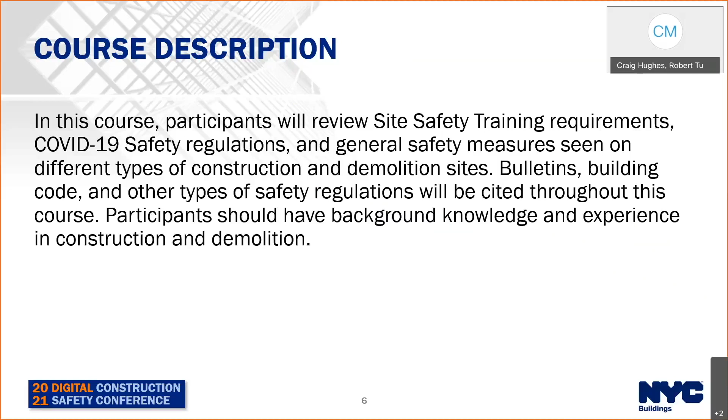We have a lot of information to share with you today. At the end of today's course, participants will review and be able to explain proper COVID-19 safety protocols on construction sites and how they prevent the spread of the virus. We will discuss Local Law 196 and updated site safety requirements to ensure all workers on construction sites are fully and safely trained.

We will review Chapter 33 of the Building Code and other general site safety construction codes, plus demolition and gut rehab safety codes in order to mitigate hazards, to create a safe environment for workers, the public, and properties.

For our agenda, we will be reviewing Local Law 196 and Site Safety Training Requirements, SST, COVID-19 job site requirements, general safety, construction safety including high-rise, which is major buildings 10 plus stories, and low-rise, under 10 stories. Scaffolds, which will include sidewalk sheds, supported and suspended scaffolds. Also included on our agenda is demolition safety, which includes demolition plans, pre-demolition, demolition notification, demolition safety, and demolition sign-off.

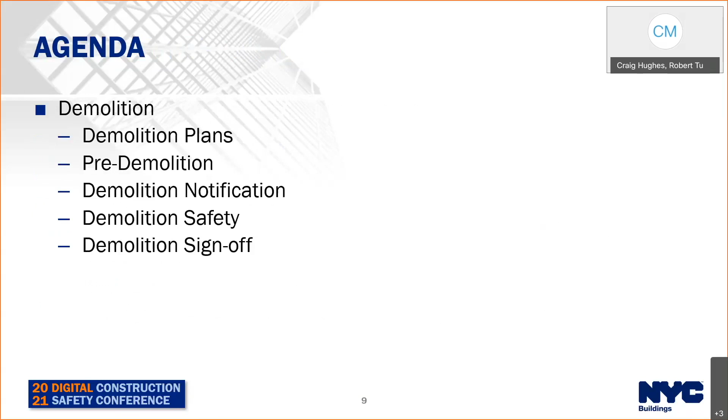We will be going over what is general construction site safety, why it's important, hazard mitigation, and the most common violations.

General site safety refers to safety measures that need to be taken at almost all sites, regardless if they're open, closed, or an interrupted work site. As legislation and current events evolve, so does general site safety. In 2017, Local Law 196 was signed into law, and DOB updated the training requirements for workers on construction sites. In 2020, the pandemic COVID-19 caused worker interactions and safety measures to change.

What is general construction site safety? Here are some examples. Maintaining proper housekeeping, such as removing debris. Keeping and maintaining all required documents on site. Fire safety, such as fire extinguishers, must be kept on site in accordance to FDNY. Training, making sure all construction workers on site have at least 40-hour site safety training.

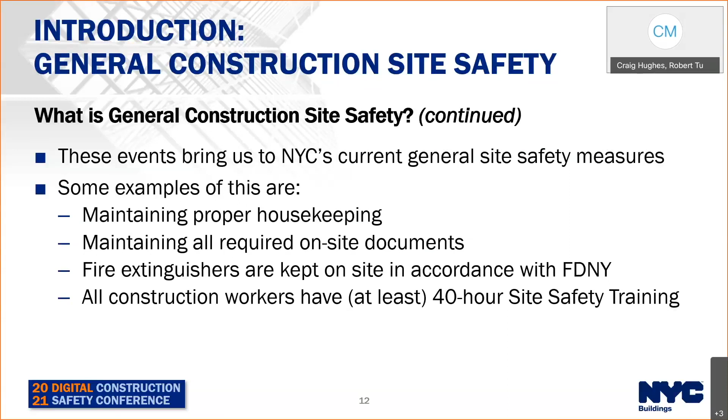Responsibilities for closed and interrupted work sites. A closed site is a site that is inactive for a short period of time, with anticipation of returning in the near future. An interrupted work site is a site that is inactive for a prolonged period of time, with no anticipation nor scheduled date of return. Some of the reasons may be lack of funding, and it will remain closed until they reestablish funding. Interrupted work sites must keep permits up to date, and site safety inspections shall be conducted periodically to ensure the safety of the site has not been compromised.

Hazard mitigation. There are 5 methods of control to mitigate hazards, listed here from most to least effective. Elimination, which is the most effective, to physically remove the hazard. Substitution, replacing something that produces a hazard with something that does not. Engineering controls, isolate people from the hazard, such as barricades and controlled access zones. Administrative controls, institute safe work practices, such as training, written rules, and policies. PPE, provide workers with personal protection equipment.

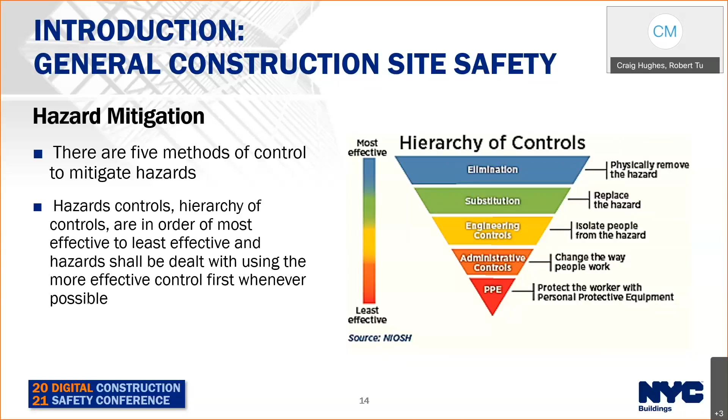Why is it important? In 2020, there were a total of 796 incidents. The top incidents were materials fall and struck by, which is 23%, slips, trips, and falls, which accounted for 36%, and lacerations, which accounted for 24%. Using safety measures and hazard mitigation acts as incident and injury prevention. It saves money, time, and resources in the long run.

The top 10 violations issued for site safety monitoring are as follows. 26% of the violations issued were due to work not conforming to the approved documents. 16% of the violations issued were due to sites failing to maintain or display safety documents as required by Chapter 33. 10% of the violations are due to the construction superintendent's failure to perform duties.

10% of the violations issued were due to job site fence not being maintained as per code. 9% of the violations issued were due to failure to comply with the fire code. 8% of the violations issued were due to failure to protect adjoining or adjacent property. 6% of violations issued were due to failure to maintain scaffolds as per code. 5% of the violations issued were due to failure to obtain required training.

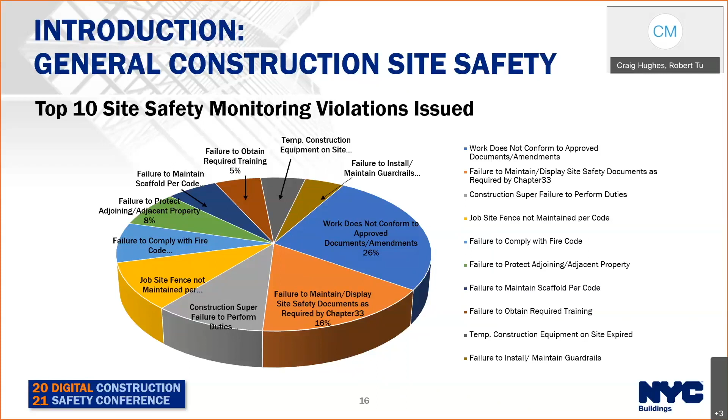Another 5% of the violations issued were due to temporary construction equipment on site being expired, and 5% were due to failure to install or maintain guardrails. So that's just an idea of what violations we're seeing out there, and this way you're aware of what you could do to prevent getting violations.

So let's get started and discuss our first topic, Local Law 196 and site safety training.

Due to the increased number of incidents in recent years, Local Law 196 of 2017 has been implemented. As a requirement of Local Law 196, workers at job sites requiring a construction superintendent, a site safety coordinator, or a site safety manager must have approved site safety training. Local Law 196 requires construction workers to have OSHA 30-hour training and an additional 10 hours of Department of Buildings approved site safety training in order to work on a construction or demolition site.

Another alternative to this requirement is to have completed 10-hour training and take an additional 30 hours of approved Department of Buildings safety training. Local Law 196 site safety training requirements can also be met by participating in the Department approved 100-hour training program.

Please keep in mind, as of March 1st, 2021, the full site safety training requirements have been implemented and are being enforced. The site safety training requirement is a worker's card that shows the worker has participated in a combination of an OSHA 30, 8-hour fall protection, and a 2-hour drug and alcohol awareness training.

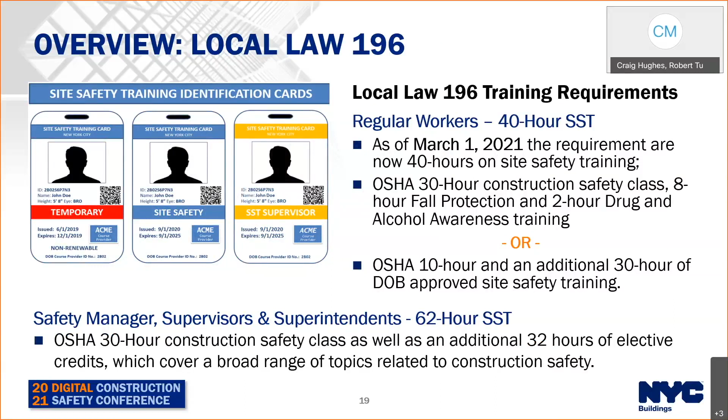Site safety training cards are needed for all active construction sites requiring a site safety professional. A site safety professional is mandatory for the following.

A construction superintendent is required to oversee construction sites up to 9 stories. A site safety coordinator is required to oversee safety on construction sites 10 to 14 stories. Keep in mind that a coordinator is limited to just covering job sites 10 to 14 stories, while the site safety manager is allowed to oversee 10 stories and higher with no restrictions. A site safety manager is required to oversee safety on construction sites of buildings 15 stories and higher.

1, 2, 3 family new building constructions are exempt from SST card requirements as they do not require a safety professional to be on site.

Below is a link to the Department of Buildings online map that shows active construction sites with site safety professional requirements. Anybody can verify if this site requires an SST card. I'll just let you look at that. If you like, you can copy that.

Local Law 196 identifies who requires safety training, as the list shows. Construction superintendents, site safety coordinators, site safety managers, competent persons, and construction workers are just to name a few.

However, please note it also shows employees of DOB licensees and employees of DOB registrants. If a DOB licensee or registrant has workers accompanying them to a construction site, they are actively engaging in construction activities. Those unlicensed workers must be fully trained to work along with the DOB licensee and registrant.

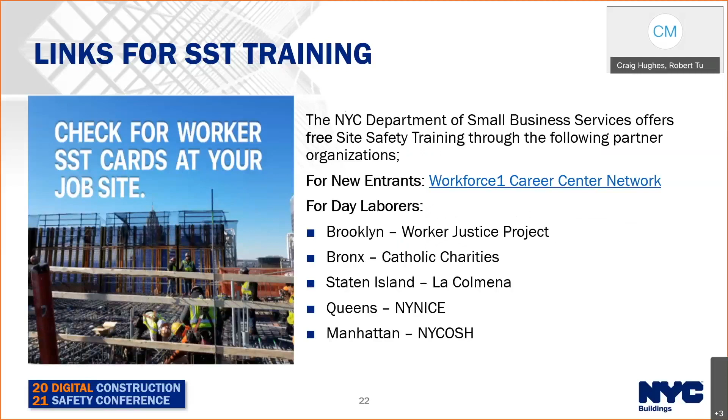Interested construction workers can register for more information by clicking on the link for the Workforce1 Career Center Network website. Day laborers who register with the site will be directed to one of the day labor organizations listed above.

The Department of Small Business Services issues a full site safety training card that represents an individual has completed the 40 hours of required training to be on designated SST construction work sites. Individuals who want to obtain the Department of Small Business Services site safety training card can do so by meeting one of the 2 criteria mentioned previously.

Local Law 196 also identifies workers who don't require safety training. That list includes building site owners, developers, project managers and construction managers, delivery persons, flag persons, special inspections consultants, security officers, and service technicians, just to name a few.

Here we are showing a few do's and don'ts for our site safety professionals. Do's consist of items such as signing the logbooks every day, maintaining a presence on the site while work is being performed, and designating someone as a competent person in the absence of a construction super. Keep in mind, construction supers are the only ones that can designate a competent person for their sites.

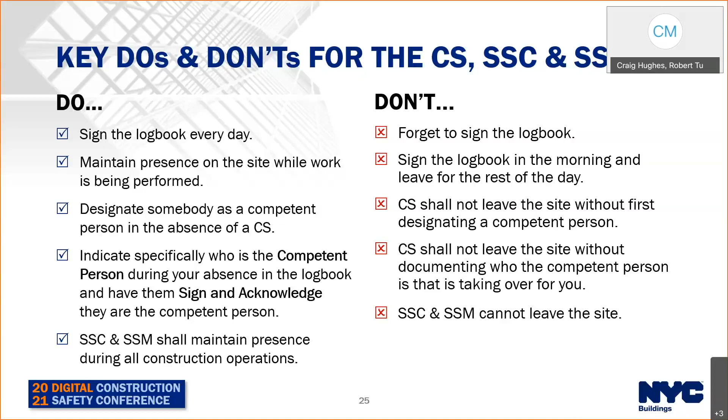A competent person can't just be anybody. A competent person is one who has a 62-hour site safety training supervisor's card and is capable of identifying existing and predictable hazards in the surroundings or working conditions which are unsanitary or hazardous to the employees, and who has authorization to take prompt corrective measures to eliminate them.

Some do's to be aware of if you're selected as a competent person. You do need to maintain a safety presence at all times. Stay on site during active construction or until you are relieved from duty. Be knowledgeable in the construction activities being performed. Keep up to date on trainings and on new means and methods.

Stop any unsafe activities. And some of the don'ts for being a competent person: don't ignore safety regulations, don't leave the site without being relieved, don't be inexperienced or a novice, don't take on more than you can handle, and don't be afraid to report issues or concerns. Remember, safety is everyone's priority.

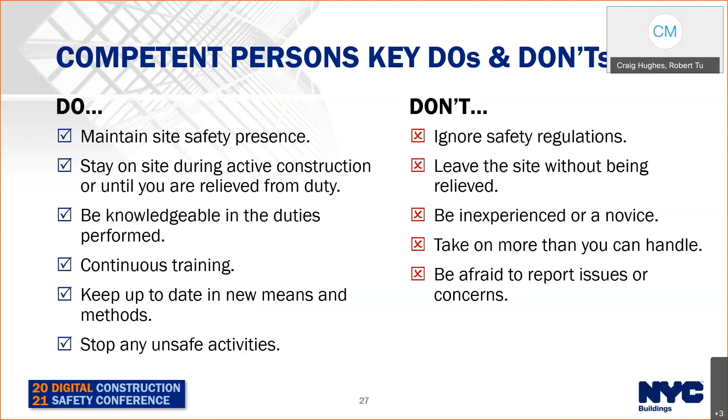Moving along, we will now discuss COVID-19 New York State guidelines as it relates to active construction sites. We will cover in the following slides the site requirements as well as precautions you, as a worker, should take when working at an active construction site. Keep in mind, this should all be in place prior to you reporting to work by the employer. However, you should know what is required and how you can protect yourself and your coworkers from COVID. This will ensure the virus does not continue to get passed along. So let's get started.

All employers are required to register and follow the New York State guidance prior to opening the construction site. These guides are set up for everyone's safety. These include completing and submitting the New York State Business Affirmation, which must be posted at every individual active job site, and developing and maintaining a COVID-19 site safety plan.

Designate a COVID-19 site safety manager. Develop and maintain a COVID-19 communication plan. Develop and maintain a cleaning log and a contact log. Post and maintain signage that is consistent with the Department of Health COVID-19 guidance. And as a reminder, all workers are required to wear face coverings unless medically prohibited.

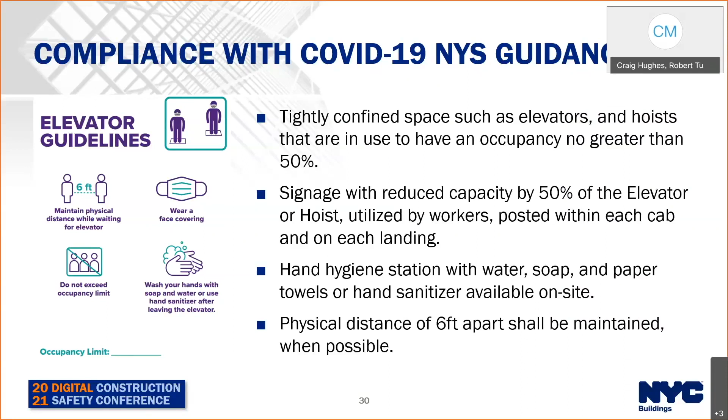Part of the safety template, the owner is required to provide all the information and the precautions they will take for all active sites. The plans are specific to each construction site. Each plan will identify the persons responsible to ensure compliance with the COVID-19 site safety plan, the owner information along with their contact information. Within the plan, the owner shall explain how workers will be properly self-distancing, how meetings will be conducted safely, social distancing markers placed in common spaces, limiting in-person gatherings, designated areas for pickup and deliveries, and posted signage throughout the site, consistent with New York City Department of Health and Mental Hygiene guidance.

As hygiene is a key element in protecting everyone, the plan should include cleaning information, identify who is responsible for maintaining the cleaning logs, and when areas are cleaned along with their frequencies. Remember, the best way to protect yourself is to wash your hands frequently with hot water and soap or use hand sanitizer.

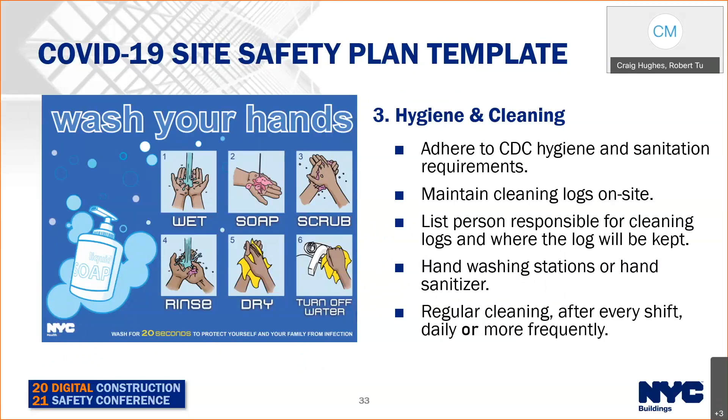When you return to an active construction site, the employer is required to provide all employees with proper PPE. This can consist of a mask, eye coverings, and gloves. But keep in mind, all items are not to be shared with anybody else. Limit sharing objects like tools or work gloves. Hand tools should be sanitized before sharing them with somebody else.

Part of the signs that you see around the construction site are also part of the COVID-19 safety plan. Employers are required to identify them and post them as required. It's your job to follow them to ensure your safety as well as everybody else's safety. When you're on a site, you need to follow these signs to the best of your ability.

Also, notify your employer if you test positive at any time. It's important that you tell them so others who may have had close contact can get tested for COVID, and vice versa.

Keep in mind that a COVID-19 site safety manager is to be designated on every site. This role could be performed by site safety personnel, such as a construction super, site safety coordinator, site safety manager, or anyone with a site presence, including a construction worker. If you're going to be that person responsible for this role, ensure you know the tasks you will need to perform to always keep you and everybody safe.

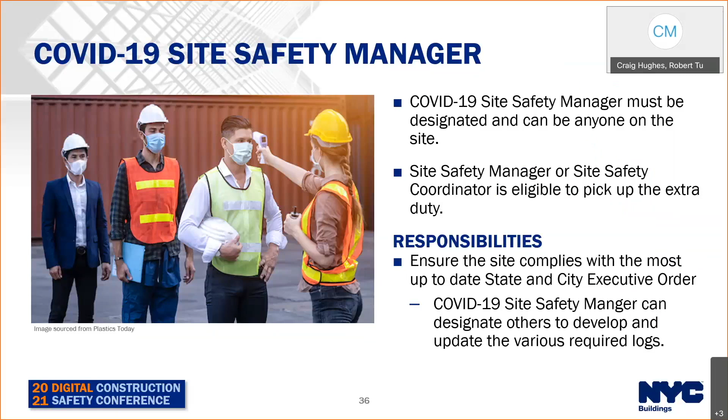Now let's go into general site safety. We will be discussing high-rise and low-rise construction, scaffolds and sidewalk sheds, excavation, gut rehab, and interior demo. Now let's start discussing site safety for high-rise and low-rise construction sites.

Construction oversight: a construction superintendent is required during construction or demo of buildings less than 10 stories. They can designate a competent person to act in their place. They must visit their sites at least once daily and can manage up to 10 sites on their license. They have the ability to order or direct corrective actions of unsafe conditions.

The site safety manager is required during construction or demo of major buildings. They cannot designate a competent person. They are required to remain on site at all times. They notify the responsible parties of any unsafe conditions, and they note it in the site safety log.

In Building Code 3307.6.2, sheds are an important part of site safety and are required when the planned building reaches the height of the proposed shed, which is generally at the second story. Sheds need to be inspected daily and must be ensured that they are in compliance. We will go more into shed details further into this presentation.

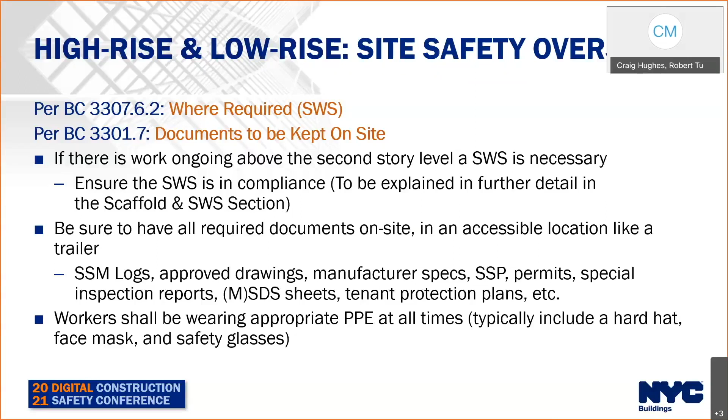In Building Code 3301.7, documentation: all required on-site documentation must always be available on site for DOB inspectors. Documents should be located in one area, such as a field office, trailer, or shanty. Workers on site shall wear appropriate PPE at all times, such as a hard hat, face mask, safety gloves, and safety glasses.

Some important items to note: when erecting or demolishing a building, adjoining buildings shall be protected from damage during construction operations. Protections for roofs, chimneys, skylights, and mechanical equipment are just a few items covered in Chapter 3309.1.

In Building Code 3305.2.5, taglines: when hoisting materials such as structural members, taglines shall be used to prevent uncontrolled movements.

In Building Code 3301.11.1, site safety orientation: this shall be provided to all employees prior to allowing them to engage in construction or demo operations.

Okay, just hold on 1 second.

When erecting and demolishing buildings, adjoining buildings shall be protected from damage. During construction operations, protect roofs, chimneys, skylights, and mechanical equipment, just to name a few.

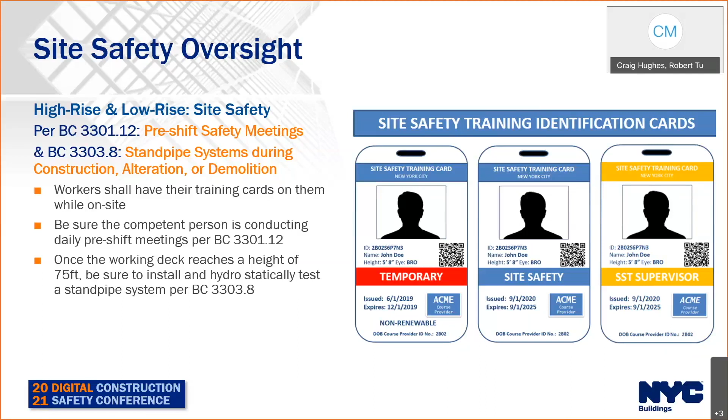Low-rise and high-rise safety oversight. Building Code 3309.8 sets requirements for adjoining walls for construction or demolition operations that expose or breach adjoining property walls. The walls must maintain structural integrity, and all necessary repairs must be made. In demolition, all pockets and open beam holes must be filled and proper anchorage ensured. In addition, all required fire exits and passageways must be maintained or a substitution provided as per code. The person causing the construction or demolition operation shall cover the expense.

Notification requirement, as in 3309.1.1. Where a construction or demolition project will require access to an adjoining property, written notification shall be provided to the property owner at least 60 calendar days prior to commencement of work. The notification needs to describe the work necessary, the schedule and duration, plus any inspections or monitoring details, and provide all necessary protection.

3309.3: when permission is obtained, a physical inspection shall be conducted by the person causing the construction or demolition operations prior to commencement and at reasonable periods during the work. Observed conditions must be documented and made available to the department upon request.

Site safety oversight: netting and guardrails. Building Code 3308.6.1.1, horizontal netting is required for construction of new buildings and for vertical and horizontal alterations of existing buildings when the uppermost walkable floor reaches a height of 6 stories or 75 feet above ground level or an adjoining roof. In concrete structures, more than 2 stories below the stripping floor or 30 feet. In steel structures, at the uppermost story where the construction slab has been poured.

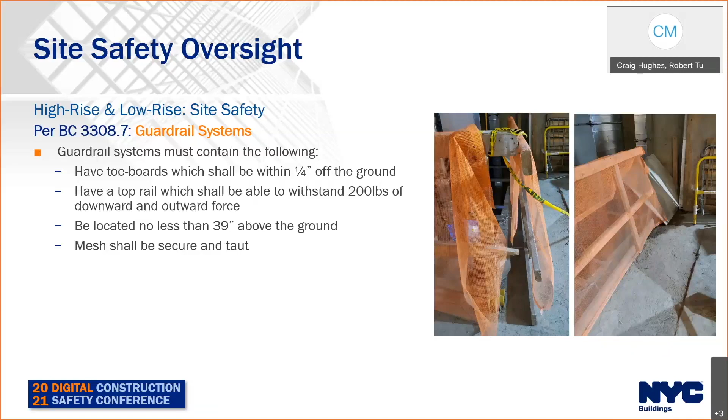Mesh netting shall be secure and taut. This picture shows an unsecured guardrail with the mid rail improperly placed and loose mesh netting. You obviously wouldn't want to rely on that to stop workers from getting hurt on the site.

3308.5: vertical netting shall be installed and maintained to cover all unenclosed perimeters below the floor on which horizontal netting is required. Vertical netting must be secured and kept closed at all times, except during actual loading operations or perimeter construction operations.

Section 3308.5.3, cable requirements: the netting should be secured with non-corrosive wire capable of withstanding a load of at least 200 pounds applied in every direction, except upwards. The cable height must be at 60 inches, 42 inches, 21 inches, and 0 inches above the level of the floor, known as a zero cable.

When installed at the roof level, the roof mesh netting shall be secured and taut. Horizontal netting must be taut per BC 3308.5.4. Structural netting needs to comply with ANSI A10.11 per Building Code 3302.1. Compliance with ANSI standards should be labeled on the equipment and material, or can be determined by contacting the manufacturer. Make sure horizontal, vertical, and alternate netting are in compliance with the design drawings, manufacturer recommendations, and BC 3308.

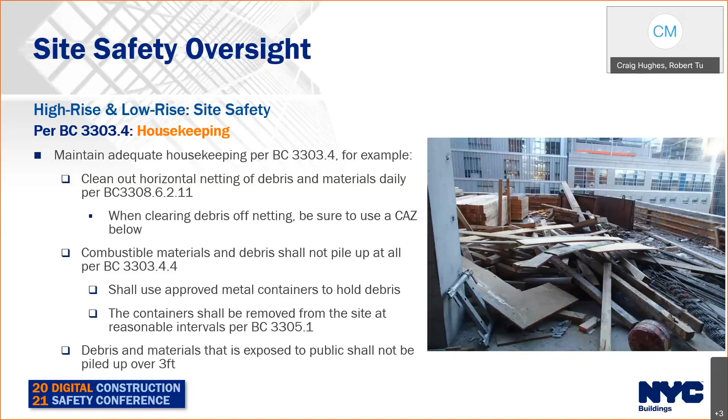Building Code 3303.4.4, control of debris: all floors, roofs, and working decks shall be cleaned of debris at least once daily. Any debris that cannot be removed from the site by the end of the shift will be placed in approved metal containers. As per section 3303.5, combustible materials and debris shall be removed as per New York City Fire Code.

On hot days, temperature can vary depending upon conditions such as humidity and sun. Workers can become susceptible to heat stress and should stay hydrated, take breaks outside of the sun, and monitor how they feel. Some important signs to recognize and monitor for heat stress are dizziness, fatigue, heavy sweating, confusion, thirst, and nausea.

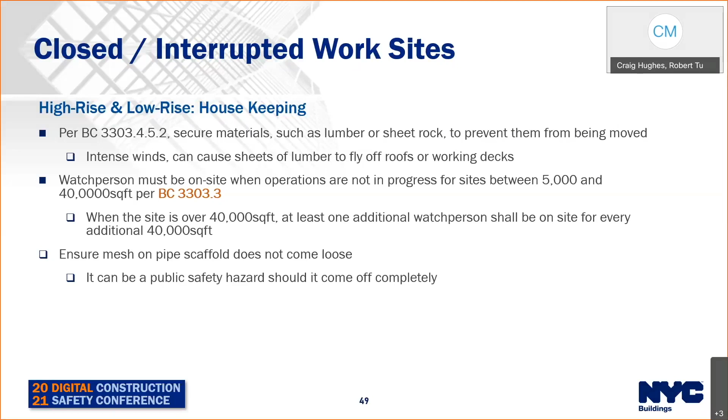Continuation of closed and interrupted sites. Perform housekeeping as per Building Code 3303.4. Perform a walkthrough and provide a full cleanup of the site to remove all debris and remove all tripping hazards for the public. Ensure proper lockout tagout procedures for cranes, derricks, hoists, and heavy machinery on site. Building Code 3303.14 requires all accumulated water shall be pumped out when necessary.

Now, I'm going to introduce our Construction Safety Compliance Chief, Craig Hughes. He'll be continuing our presentation, starting with the common violations issued at job sites.

Thank you, Ron. That was very informative. Now we're going to take a look, as Ron said, at some of the common violations issued to high-rise and low-rise sites.

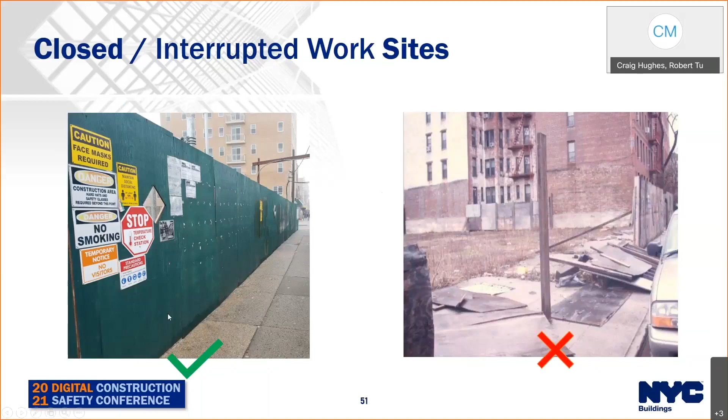Our most commonly issued violations are for adequate housekeeping, missing guardrails, fall protection, and site safety manager, site safety coordinator, or construction superintendent logs that are not adequately kept. Many times we note they are missing the pre-shift meetings, haven't been logged in, or that the safety measures have not been inspected and unsafe conditions mitigated.

As Ron mentioned earlier, it is required for site safety managers to make the proper notification. That goes for the managers and the coordinators. And this is the big difference between the license of a site safety manager and a construction superintendent, because the construction superintendent has the authority to take direct corrective measures.

They can order the workers to repair the condition. And that's another key reason why you cannot transfer those licenses. A site safety manager cannot fill the responsibilities of a construction superintendent on a project that requires a construction superintendent's license. Likewise, a construction superintendent cannot fill a job that requires a site safety manager, because they do have different obligations under those licenses.

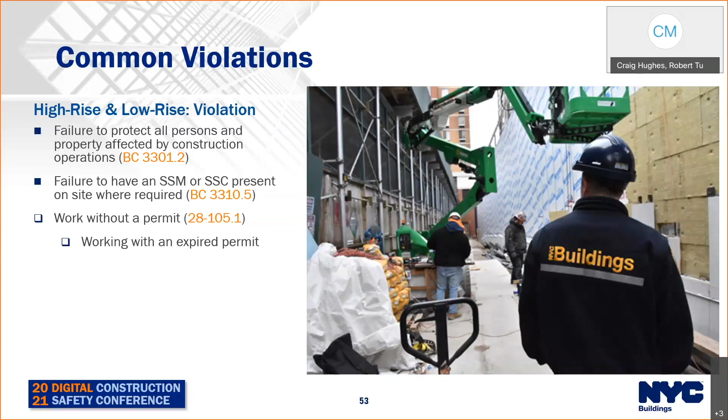Now we're going to move into talking about scaffolds and sidewalk sheds. And when we speak about scaffolds, obviously we're going to be speaking in terms of both suspended and supported scaffolds.

Scaffolds and sidewalk sheds training each have unique training requirements. For example, on the supported scaffolds, you are required to have a 4-hour user certificate if you're going to be working on top of the working deck of the scaffold, working on the building. If you're going to be altering the supported scaffold, changing it in any way, installing it or removing it, even moving the planks around, you need a 32-hour supported scaffold erector certificate.

For the suspended scaffolds, you'll need the 16-hour scaffold training, which is required for workers who install, remove, maintain, repair, or use the scaffolds. And for the setup of suspended scaffolds that require outrigger beams and counterweights, you will need to have that supervised by someone possessing a 32-hour rigger suspended scaffold certificate.

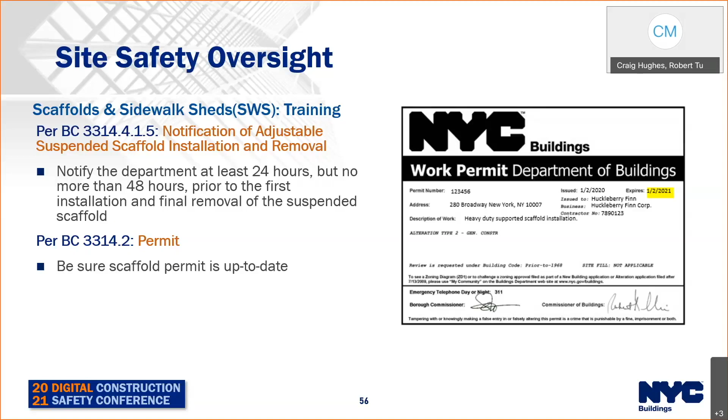Now we move on to the requirements for maintaining these scaffolds. The inspections required daily include inspecting the working deck of a supported scaffold to assure it's fully planked, overhangs are between the 6-inch minimum and 18-inch maximum, and that the planks are tightly fit together. That's for the working deck of the supported scaffold.

The scaffold has to be secured to the building prior to the start of work, clearly. This should be checked in the daily inspection by the competent person prior to use, ensuring that none of the tiebacks are loose or deteriorating.

The site safety monitoring program, per BC 3314.3.2, concerning the suspended scaffolds, the scaffold must be shown on the location on the site safety plan and built in accordance with the pertaining documentation. Scaffold designs are designed by a licensed professional, and that's a code requirement per BC 3314.3.2.

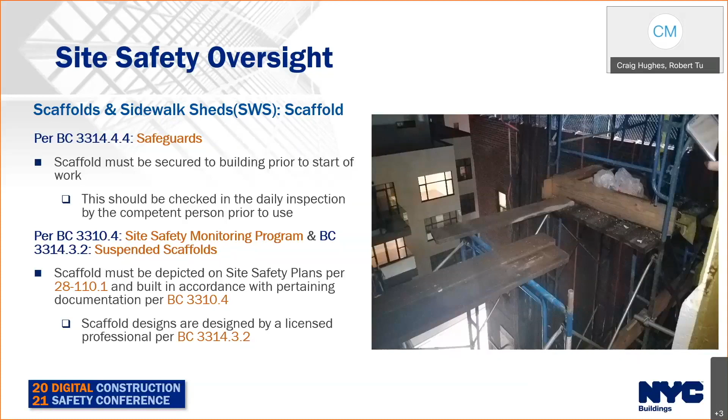Scaffolds, conditions on scaffolds change daily. Be sure to conduct and record all required inspections to assure the scaffold is safe.

Scaffold inspections require pre-shift inspections to be conducted daily before use, and that applies to both suspended and supported scaffolds. Both types of scaffolds need an inspection after installation and after any modifications, repairs, or adjustments. All of those inspections need to be documented and logged into the inspection logbook, conducted by a competent person.

Now, the competent person in this case is not necessarily the one named by the construction superintendent, but rather it's the one trained by the scaffold installer or the GC specifically for inspecting the scaffolds.

Scaffold atop a sidewalk shed needs to be on the site safety plan. Sidewalk sheds shall be heavy duty per BC 3307.6.4.2.

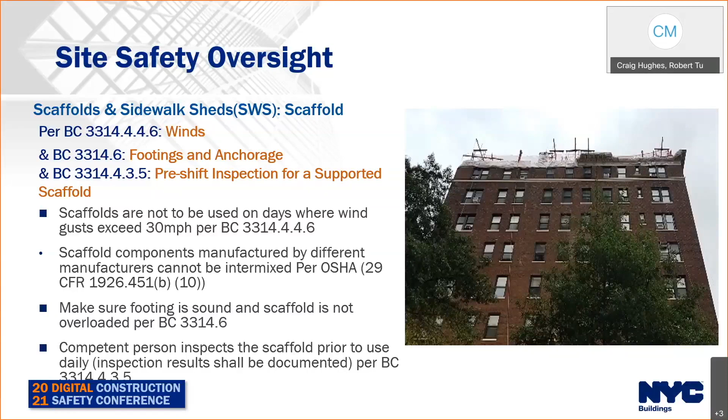When is a sidewalk shed required? When performing work that requires a sidewalk shed, the sidewalk shed shall be installed before the commencement of such work and removed once that work is complete, per BC 3307.6.2.

Sidewalk sheds are not required when pedestrian walkways are completely closed, or if other means of overhead protection are provided, usually via a CCD1. It's not often that you'll see them. Generally, they do require it.

Remember, on major buildings, those are buildings 10 stories or greater, the removal of the sidewalk shed requires a DOB approval. Buildings that are less than 10 stories would only require DOB approval if an unsafe local law 11 filing status is on record with the department. Otherwise, those sidewalk sheds can be removed with a 24 to 48 hour notification of removal to the department.

When erecting a sidewalk shed, it's designed by a design professional, and it must cover the entire pedestrian walkway with an additional 5 feet lengthwise to either side for work up to 100 feet in height, and an additional 20 feet for work greater than 100 feet in height. Beneath the sidewalk shed, you must provide a clear path of at least 5 feet wide and 8 foot tall per BC 3307.2.6 and 3307.6.4.7.

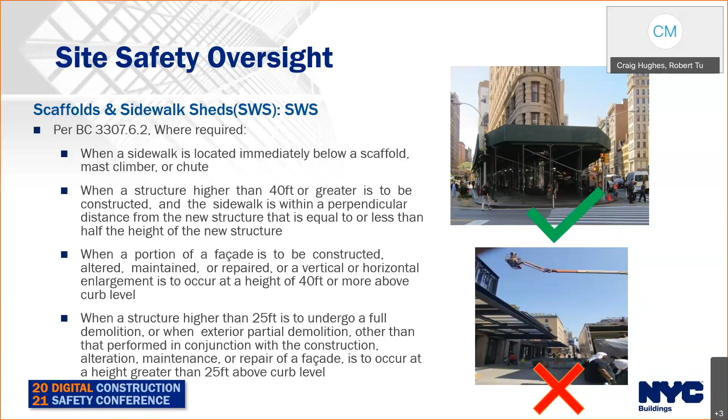Remember, the site the shed is to be placed on should be inspected to account for any special adjustments such as ADA ramps, driveways, bus stops, subway entries, etc. You really need to look at that so that you can properly design the shed in the plans.

Check that the platform, when inspecting the shed post-installation, is fully planked and that the sidewalk shed is as close to the facade as possible. It has to be within 1 inch, and if there's any gap, that needs to be sealed.

Sidewalk shed shall be designed by a registered design professional, as I just said, and the exception is sidewalk sheds prescribed and approved by the Commissioner or the Board of Standards and Appeals, BSA number 351-74 SM, may be filed by an unregistered applicant. Again, if you're going to do such, make sure that there are no special provisions required to account for site conditions that the standard designs may not have accounted for.

When hoisting over the sidewalk or working with a suspended scaffold, provide warning signs where special danger exists. When conducting operations open to the public, a flag person must be present and operating.

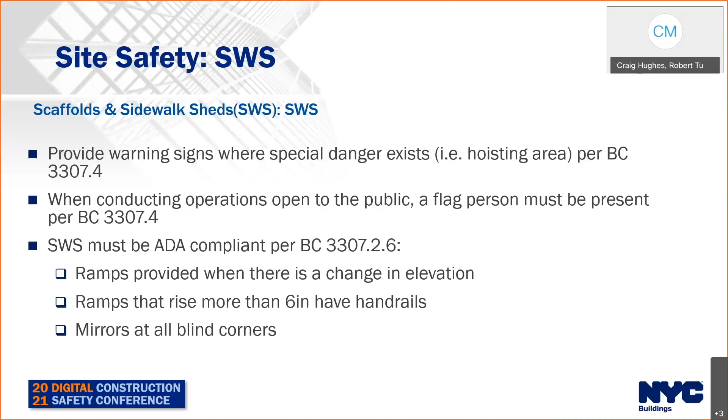If the construction is over 100 feet in height, be sure to use a heavy-duty sidewalk shed per BC 3307.6.4.2. Outer sides and end of sidewalk shed should be 3.5 feet in height. That's basically the shed parapet per BC 3307.6.4.

Make sure sidewalk shed is not obstructing egress of the fire escapes, that it's not obstructing Department of Transportation street signs, nor driveways.

Be sure to visually inspect the sidewalk shed daily and follow up with more thorough inspections every 6 months on sheds that are just placed up for issues where there was a maintenance issue on the facade where active work may not be occurring, and it may not be subject to the daily inspection.

Be sure to maintain the deck. You shouldn't have any storage or debris, and make sure that it's swept daily. Again, storage is only allowed if designed in the shed and noted on the permit.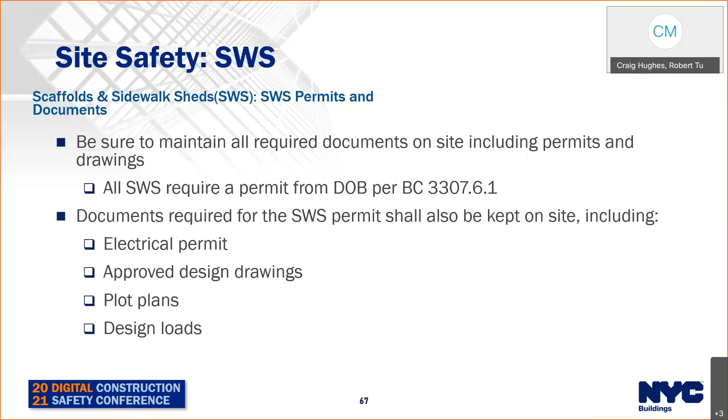Be sure the sidewalk shed is painted hunter green and there are no private business signs. Again, those signs can get very costly to the contractor.

If it's a special operations unit that goes out and it's an outdoor advertising sign, not a business accessory sign, those violations are starting at $10,000 each and usually are issued to the general contractor, the permit holder, and the building owner as well. So be diligent in making sure that your sheds are free of advertising signs, no private business signs. Ensure any and all light fixtures are vandal proof.

Now we're going to review again the removal process, and this is for sidewalk sheds from a major building site. Make sure that all work has been completed above the second floor, that there is no longer need for temporary construction equipment or structures. That means when we're talking about that, that's also on the adjoining properties.

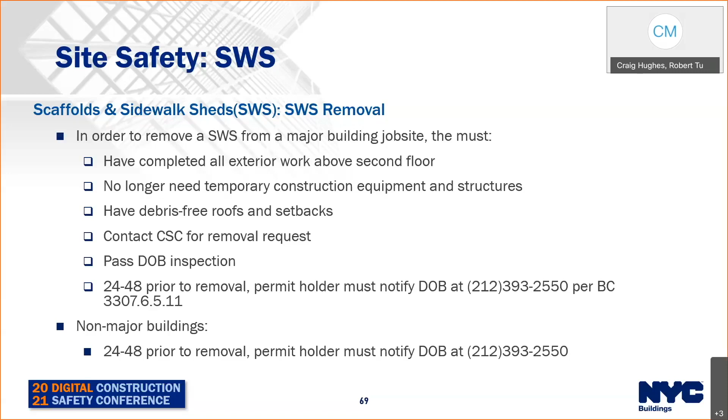For non-major buildings, those less than 10 stories, again, 24 to 48 hour notice prior to removal. If the building is subject to local law 11, remember that they must assure that the last filing was not an unsafe facade filing. If it is an unsafe facade filing, then they would have to contact our facades unit to get permission to remove the shed.

Scaffolds and sidewalk sheds. Now we're going to discuss what happens and what your requirements are for sheds that are closed at closed sites.

If a sidewalk shed is designed and approved to be used for storage, then such materials and equipment should be secured prior to closing the site for the day, for the night, for the weekend.

Winds and other loads should be taken into consideration when designing sidewalk sheds per BC 3307.6.4.2.1. Netting should be checked for holes and tears. This way, materials and equipment cannot fall off scaffolds, endangering the public. Even the netting itself can become a hazard if it's torn to the point of being dislocated or dislodged from the scaffold itself.

Failure to maintain the scaffold in the code. Now we're going to go over some of the common violations issued to scaffolds that are not code compliant.

So the first one is from BC 3314, the general provision. Failure to maintain the scaffold in a code compliant manner, not altering it so it's no longer built contrary to the drawings. Scaffold built and maintained in use contrary to plans.

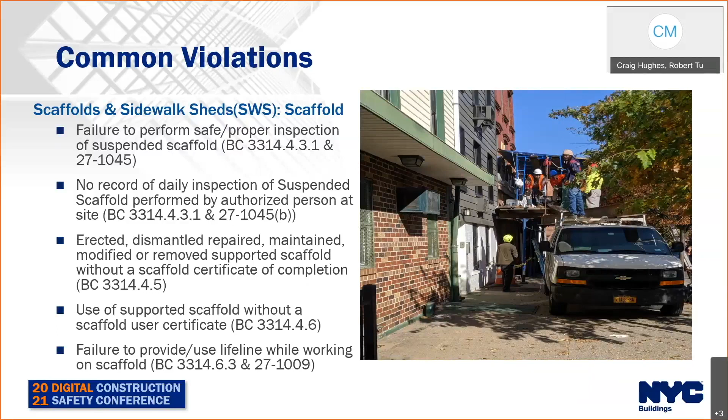And here we see a couple of examples. I want to really go to the one on the right, where we have that mistake. Now, they tried to put in some anti-chafing, but unfortunately, it's not located in the right position. And that's really important. The user of the lifeline in the photo to the right failed to properly position the anti-chafing safeguard. If that is not in the right spot, just the wear and tear over one day can tear through that rope and be in for an unpleasant event should there be an incident or an accident on that scaffold.

So, scaffolds and sidewalk sheds violations: pedestrian protection is not per code. Examples of that are when sidewalk sheds are not planked adequately, or the sidewalk shed is not ADA compliant, meaning that they may have a component which is obstructing or blocking the corner where the DOT has put in an ADA ramp. We have seen where they've placed footings down, obstructing that. You want to make sure those are maintained clear. That's why earlier we talked about the importance of visiting the site so that you make sure in the design to accommodate all of those slight changes.

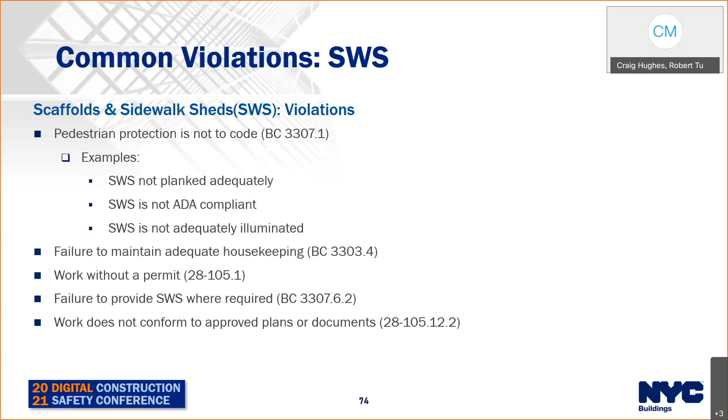Now we're going to move into excavations. Safety begins with careful planning and communication. This subject alone could be an 8-hour course. So we're just going to be going with broad brushstrokes over it.

As I said, you want to make sure that you communicate adequately to all parties and have proper documentation of that communication on site. Be sure to have it all, you can put it into a trailer or a gang box, but have it where the site safety licensee knows where to get it right away. They should really be making sure that it's maintained.

Site safety manager logs, your supportive excavation drawings, manufacturer's specs for your equipment, your site safety plan, copies of your permits, your special inspection reports for supportive excavation, that it was inspected as it went in so that you can begin the full excavation once all protection is in place.

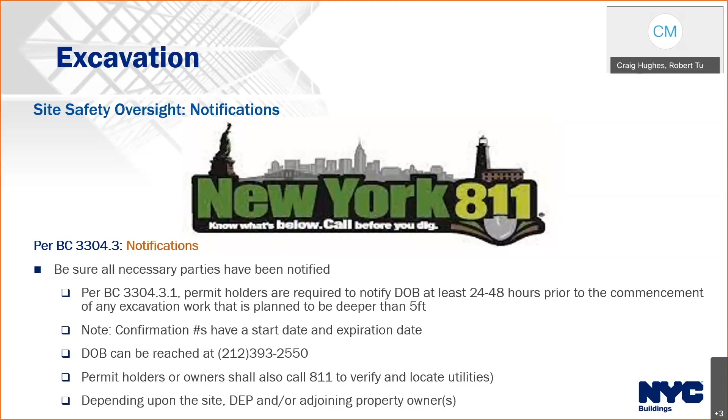Notification. Multiple entities may require notification before excavation begins. Be sure to follow all applicable rules and codes, from dialing 811 to contacting the DOB, or if needed, additionally you may need to contact DEP, sometimes even the MTA if it's within 200 feet of any surface rail system.

You must make that notification at least 24 to 48 hours, depending on the depth and location of the excavation. Other city agencies may require notification in addition to DOB. Work within 200 feet of a subway or surface rail system requires notification and approval of the controlling agency prior to permit issuance, whether it's the MTA, Metro North, or whichever rail system is associated with it.

Per BC 3304.3.3, DEP shall be notified prior to the commencement of an excavation deeper than 50 feet proposed in the Bronx above 135th Street in Manhattan, or if it's deeper than 100 feet proposed in Brooklyn, Queens, Staten Island, or below 135th Street in Manhattan. Note, obtaining a permit from DEP does not negate the notification requirement to the Department of Buildings.

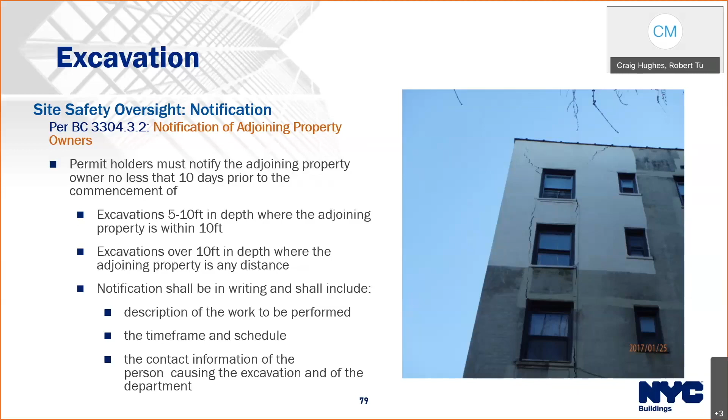Housekeeping at excavation sites. Just as in general site safety, excavations must be properly maintained. You really need to ask yourself, do you have adequate staffing of laborers for the number of trades and workers operating on that day? Has that been provided?

So once again, you must make sure, as previously mentioned in this general site safety, combustible material and debris shall not pile up at all. Debris and materials exposed to the public shall not be piled up over 3 feet per BC 3303.4.7. Clear areas accessible to the public of all ice, snow, grease, equipment, debris, etc. per BC 3303.4.1.1.

In order to maintain good housekeeping, sites should have a sufficient amount of debris containers, like waste dumpsters, to keep up with debris. We mentioned that.

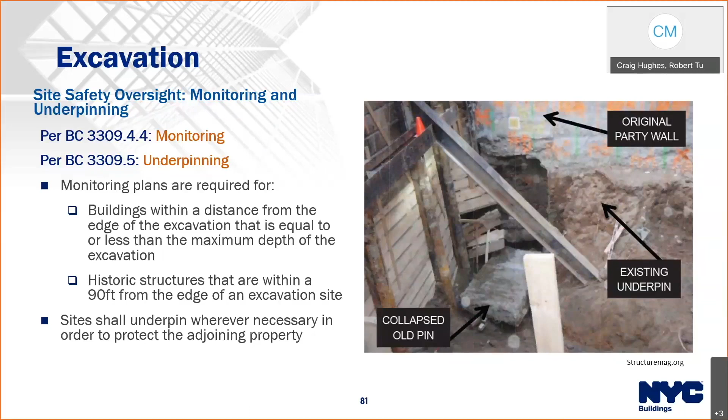Excavations deeper than 5 feet require a means of support along the excavation per BC 3304.4. Assure the support of excavation operations begin and are adequately in place before exceeding the 5-foot depth threshold.

Whichever method of support is to be used, it must be detailed on the support of excavation plans. The code does not specify which means of support is required, but does indicate what must be included and considered when preparing the SOE plan.

So they must be site-specific, illustrate all related protection for all sides of the excavation or embankment, show the extent of all work dimensions, show all utilities and public infrastructure impacted, and include the specific location and dimensions of the means of support, whether it be sloping, shoring, stepping (also known as benching), sheeting, bracing, guardrails, fences, etc.

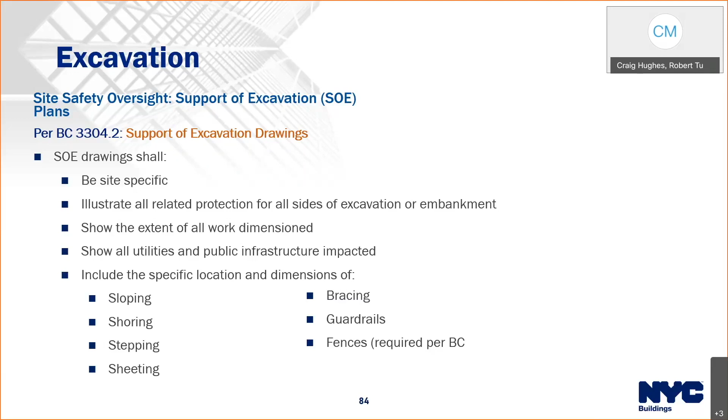Make sure all excavations have a means of egress. OSHA requires that a means of egress be within 25 feet lateral travel distance of workers in the excavation to access it.

In order to achieve this, sites may move ladders due to logistic reasons and limit where workers can work within the excavation. Those types of movements should be noted as a minor revision on the site safety plan by the site safety manager or construction super, as long as it is in compliance with Article 110 of Title 28. That's what shows you what should be included on a site safety plan.

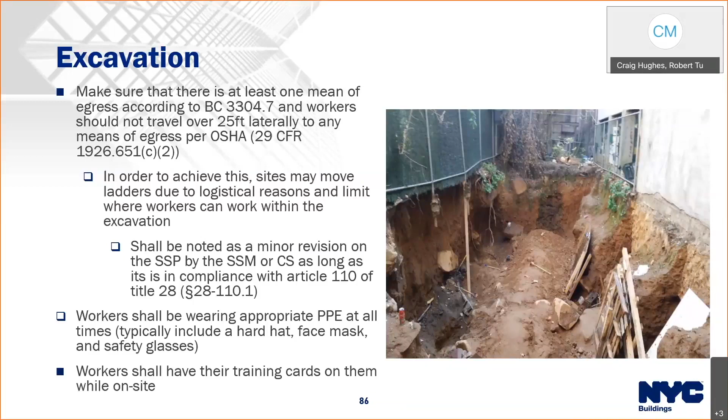After rainfall and other hazard-increasing events, the excavation should be inspected to ensure the structural integrity of the sides of the excavation are maintained. Awareness and attention to site conditions and activity requires diligence from the parties responsible for site safety, meaning all of us, from workers through to the AORs, applicants of record, by making sure plans are complete with sequencing and key requirements noted on plans.

Obviously, after a rainfall, you want to begin pumping as required. It's important to note that drowning has occurred in only 3 inches of water. A worker knocked unconscious from a falling object may land in the pooling water with their head turned to the side. 3 inches of water can cover the nose and cause drowning.

And this goes with what I just said. You really want to pay attention to your site. Make sure that anything that is an apparent hazard, take a look. Don't just go running into excavations. Make sure that your surrounding areas are safe, that the rebar is capped where necessary per OSHA regulations. All protruding reinforcing steel onto and into which employees could fall shall be guarded to eliminate the hazard of impalement. And then obviously workers operating cranes, excavators, and other heavy machinery have proper training and certification.

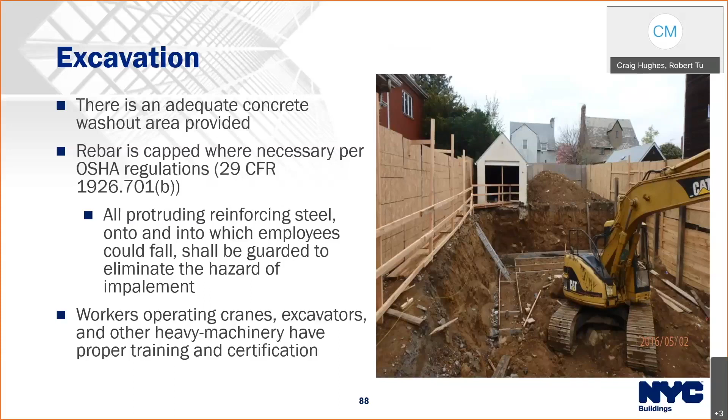Guardrail systems are required for excavations greater than 6 feet. That's standard from the same one, the site safety. You'll know that they need the top rail, which can withstand 200 pounds of downward and outward force, a mid rail, and a toe board that is no more than 1/4 inch off the ground. The height of the top rail cannot be less than 39 inches above. If netting is being used, it shall be secure and untorn.

Now we're going to discuss closed and interrupted sites. Holes in the ground are inherently hazardous. Backfilling may be expensive, however, it is the safer option if the plans for a new building are on hold or interrupted for an extended period of time. Otherwise, a monitoring program must be established following the exceptions guidelines detailed in 3303.13.3.

Walk through and make sure the site is clean and housekeeping is in compliance. This is part of your requirements when you have an interrupted or closed site. Heavy machinery is secured and locked, preferably if it's going to be an interrupted site. Hopefully you would have removed it. Ensure proper lockout tagout procedure is being followed for that equipment so that it cannot be accessed during off hours or engaged. Monitor any water accumulation. Again, you must dewater. It shall be pumped out when necessary.

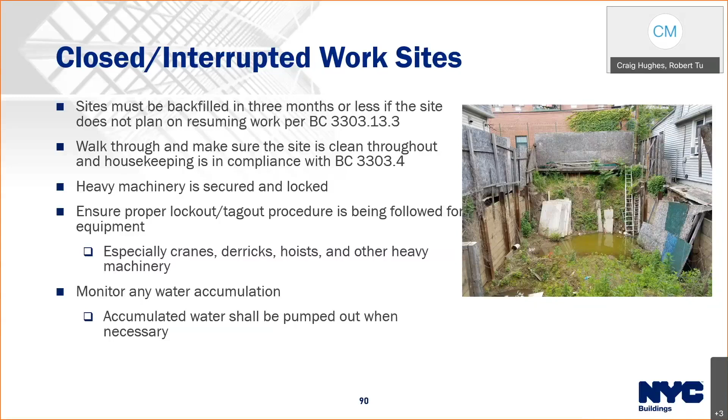Failure to conduct a baseline and periodic monitoring. Often in the notes, it will note that they needed to establish the baseline and periodic monitor. We get there, we don't see any of that on site. Violations are issued. Failure to have the monitoring equipment, as I just said, on site, and failure to have a pre-construction survey. Very important. I know very often it's difficult to get those pre-construction surveys because the adjoining properties just don't want to let you in to look at their existing cracks.

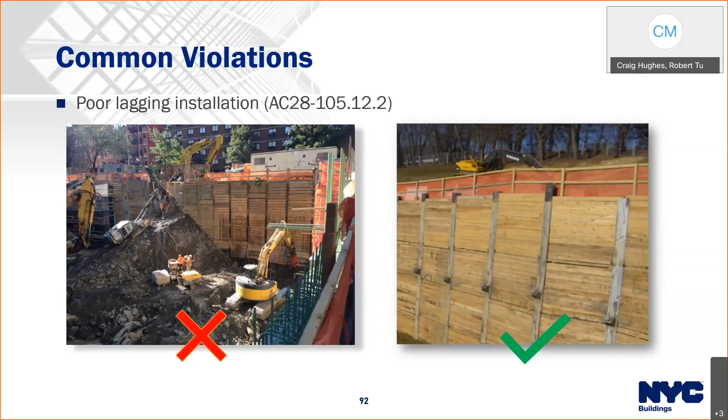Some more common violations are failure to maintain your documents on site. Remember those daily inspections and all of the required documents. No guardrails along the edges of the excavations that are 6 feet or deeper. Failure to protect utilities. No dewatering plan when we see a buildup of water. Failure to protect the adjoining property during excavation activities, very common. And underpinning section not properly braced or shored. And that can cause all sorts of problems, as we know.

Let's move on now to gut rehab and interior demo. I'll be focusing on the gut rehab in this portion of the course. There are many issues which are common to both gut rehab and interior demolition.

What is gut rehab? Well, for the purposes of the department, we're going to step aside from the real estate industry's definition and just say it's concerning building occupancy class J2 multiple dwellings with a building height greater than or equal to 4 stories, construction class of old code, principally structures with unreinforced masonry walls and wood floor joists, possibly turn of the century balloon frame dwellings with brick noggin walls. That's where they put the bricks in between the studs, and nearly all structures that average an age between 60 and 100 years.

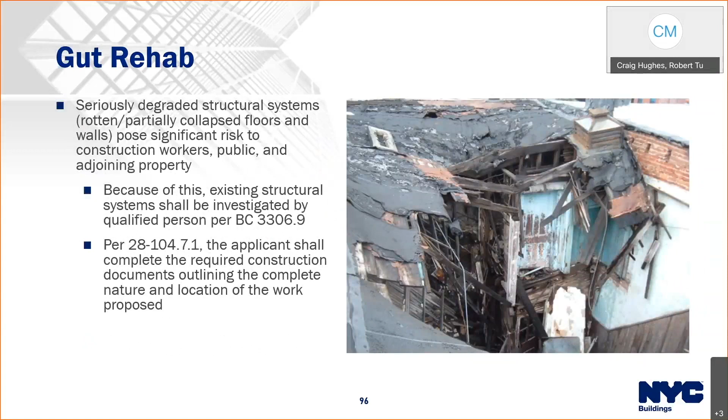Many gut rehab projects use cold form steel to replace wood joists and floors. Be sure to follow the requirements of Buildings Bulletin 11 of 2019 concerning documents to be kept on site for cold form steel, including records and results of the periodic controlled inspections. Follow all of the required guidelines, including notifications if there's excavation work going on, DEP regulations, and of course, make sure that you maintain your documents on site.

Be sure to follow the proper sequence of operations for that. Avoid the removal of floor joists bottom up during interior demolition. Avoid removal of excessive numbers or all floor joists at one time, and destabilizing exterior walls.

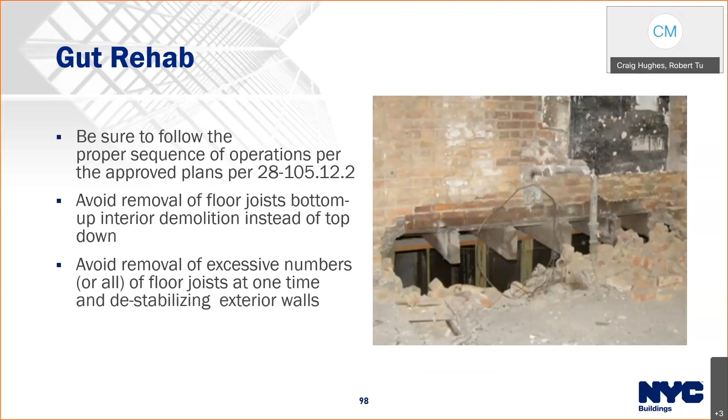Here's an important one: be sure not to remove too many floor joists at one time, as it may cause destabilization of the exterior walls. Never excavate beneath the level of existing spread and column footings to increase the cellar slab ceiling height without underpinning footing to lower the depth.

Demolition of weakened structures. Again, when working in the cellar, underpinning or underfooting to make the foundation deeper, be sure to support the foundation adequately. Per section BC 3306.7, you may need shoring, bracing, sheeting, and other types of engineered support. You must do the underpinning per BC 3309.5.

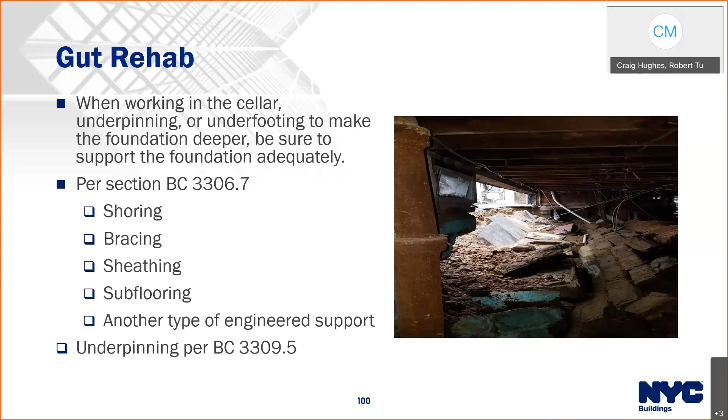Where a structure is to be demolished or has been partially wrecked or weakened by fire, you want to make sure that all support has been adequately placed. Remember, these are a lot of older deteriorated buildings, so you want to investigate and make sure adequate support is supplied throughout. And if you're going to be lowering the cellar floor, you have to make sure proper support is in place before undermining any of the column footings.

Another one is to be sure the floor joists are properly connected with the masonry wall. While this photo shows the connection of C-joists to masonry, it is important to remember when using wood joists, a 3-inch fire cut bevel is required.

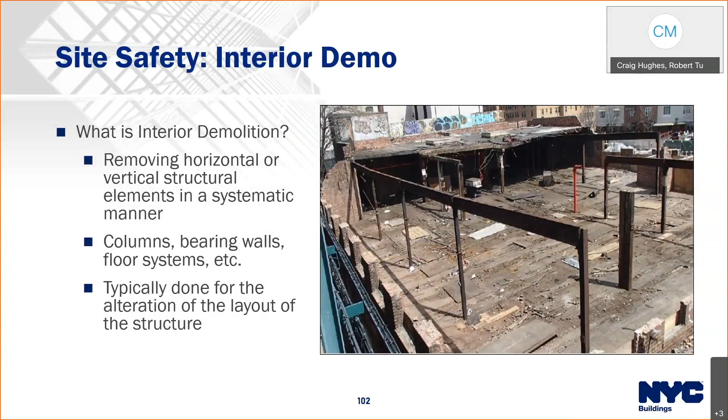Looking at this picture in the slide shows an inadequate sequence of operations. What is a sequence of operations? The order in which your project gets demolished, developed by the PE of record. If the sequence is not followed, the building could collapse, which could lead to injury, death, extreme hazards to the public. By following an approved plan and a sequence of operations, you will help to ensure your project's success.

Safety in interior demo: existing structural systems in a building being demolished must be examined. Never remove any component of the building without understanding its structural significance. Corroded connections carrying excessive load may lead to building collapse. Excessive load on corroded connections is the leading cause of failure.

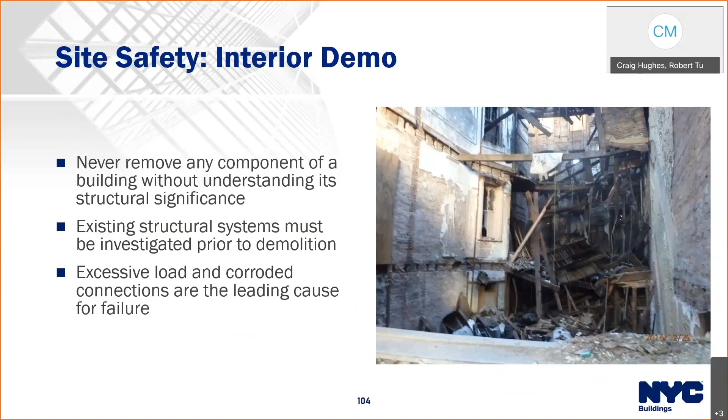Bearing partitions and headers—if we look at this picture, we can see no relieving walls and a lack of shoring, with sagging joists and downward deflection of wood joists. No shoring of any kind, with the possibility of fire cut joists being dislodged from their beam pocket. The staircase, surrounding header beams, and chimney shall be examined and shored if necessary. Shoring shall continue from the cellar through above the successive floors to ensure the safety of the project.

Examination of connections. Lime-rich mortar in older structures is subject to deterioration when exposed to moisture for long periods. Moisture can transfer to wood structures, which could lead to wood rot and structural instability. In masonry buildings with wood floors, sections of masonry walls shall not be loosened or permitted to fall in such masses as to affect carrying capacity of floors or the stability of structural supports. All demolition must be carried out in a systematic manner.

Now we move on to interior demo. In this next slide, we examine existing joist and masonry T-anchors, which will need conditions to be verified. T-anchors are often missing, especially at party walls of row dwellings. This condition can lead to a latent structural failure. Retrofitting may be required to your project.

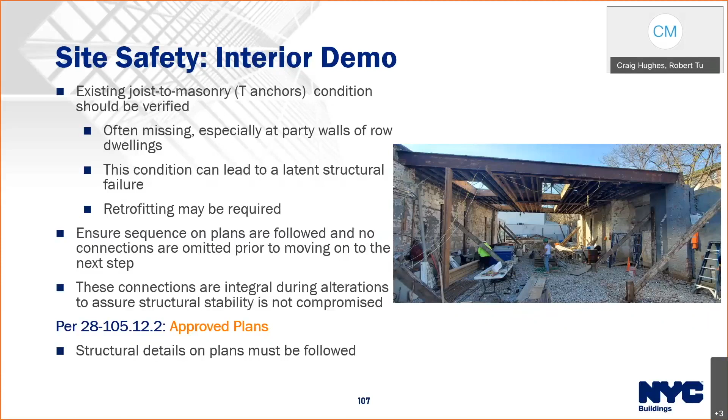Exterior wall framing must be braced. If you see in this picture here, you see the extent of the bracing that's been done. Gypsum sheathing is not an acceptable form of bracing. All bracing must be designed. It's deployed in such an old building that otherwise would collapse without this proper support.

When specifications call for gypsum sheathing in an exterior fireproof wall assembly, alternative bracing details, cross bracing, strap bracing, metal diaphragm, etc., must be provided.

Closed/interrupted work sites, gut rehab, and interior demo. Sites must be backfilled in 3 months or less if the site does not plan on resuming work, as per 3303.13.3, as mentioned earlier in this segment. Walk through and make sure the site is clean throughout. Housekeeping is compliance with BC 3303.4.

Monitor any water accumulation. Accumulated water shall be pumped out when necessary while filing all necessary DEP permits to do so. Ensure maintenance of any temporary construction, sidewalk sheds, fence, access ramps, etc.

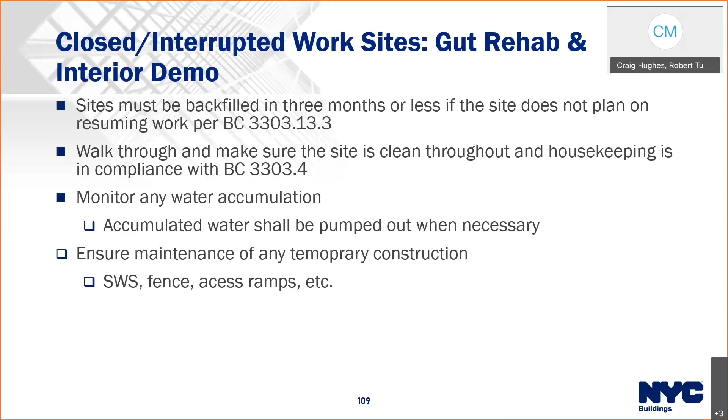Let's discuss common violations for gut rehab and interior demo. Normally, when our inspectors go on site, they are looking for work that is contrary to plans, failure to follow sequence of operations, underpinning sections not properly braced or shored, and certainly others such as housekeeping and piled up flammable combustible debris, overloading floors.

Demolition equipment mechanical. The photos shown here are some examples of mechanical demolition equipment. Photo on the left is a hydraulic breaker showing the worker breaking up the wall. It's important to note that all mechanical devices must be noted on site safety plans, indicated on all floors, reviewed to sustain the weight of the device. Mechanical use permit must be obtained.

Photo on the right is an excavator, which is breaking down steel and concrete parts of the structure. All safety zones must be indicated on the site safety plan.

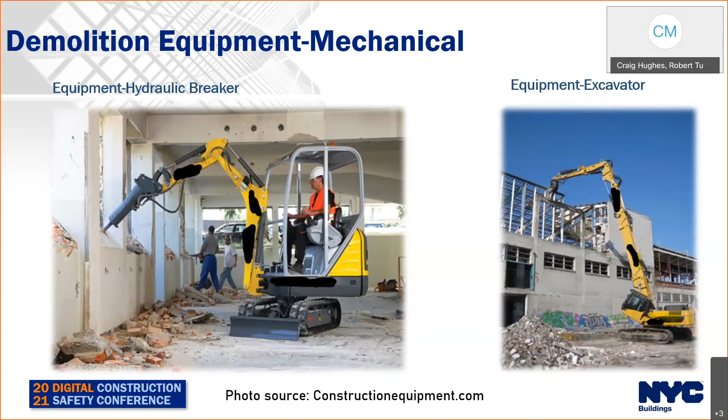In this next section, we shall be talking about when demo plans are not required, when plans are required, and plan development.

When are demolition plans not required? When there's partial demolition, demolition is limited to handheld devices, including handheld mechanical devices, performed during the course of minor alteration. Ordinary repair will no longer require demolition submittal documents. If plans are not required, a survey needs to be at the job site to verify existing site conditions.

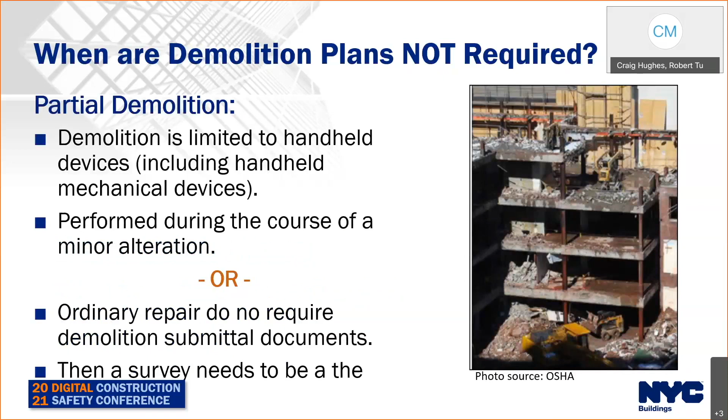Plans are not required for the following types of demos: 1 to 3 family, totally detached, to be performed by hand demo. Semi-attached, both structures are coming down at the same time and demo is performed by hand. Detached accessory structure, for example, a garage, you see in the photo in the rear. Full demolition, detached buildings other than 1, 2, 3 family houses, such as a garage.

Demolition is limited to handheld devices, including handheld mechanical devices. The floor area of the building is less than 5,000 square feet.

When are demolition plans required? As per BC 3302.1, definition of a major building: it is existing or proposed building that is 10 stories or greater, 125 feet tall, has a footprint of 100,000 square foot, or deemed by the commissioner due to the unique hazards associated with the construction or demolition of the structure. Anything that the commission deems a hazard to the public. Any structure that is attached to at least one side. Any structure that will be demolished by mechanical means.

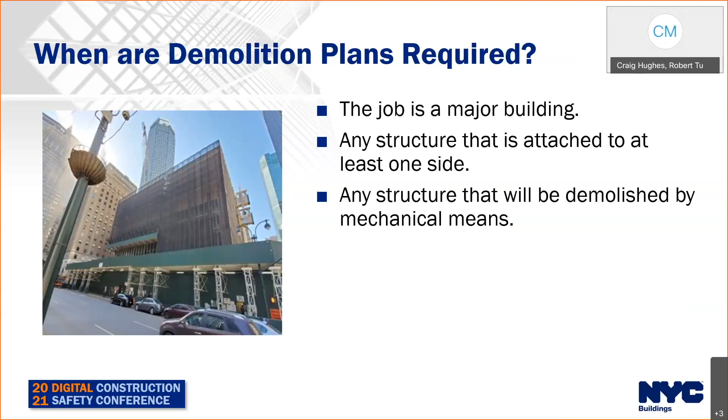Plans, development, and plan examination. For more information regarding plan development and plan examination, please attend the review: site safety demolition plans, code requirements, and alternative provisions, Thursday, May 6th at 10 a.m. to 11 a.m. Register for the upcoming course. When you participate in that course, you will obtain the entire scope of plan review and the requirements for approvals.

Pre-demolition. This segment of the presentation will go over the following topics regarding pre-demolition: inspection appointment request, pre-demo inspection, and demo permit.

Pre-demo inspection appointment request: to confirm the structure detail on the plans will be demolished. The cover sheet and all applicable sections must be filled out. For example, indicate the type of pre-inspection: full demolition or partial demolition. This form is typically used for plan exam, and you can see more of this information on the previous slide.

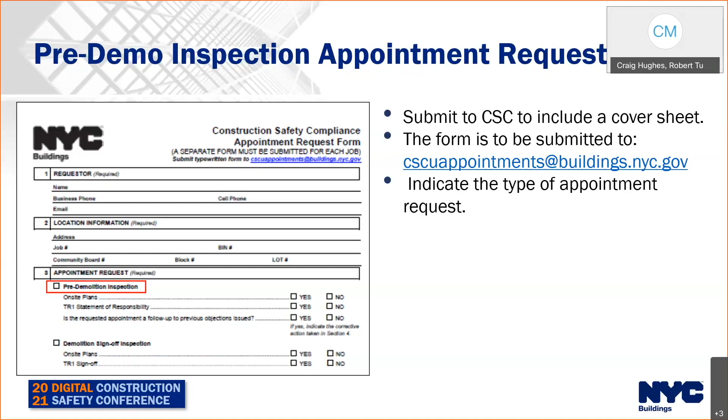Pre-demolition inspection is to ensure that the plans or information provided corresponds with what is at the location. Once an inspection has been scheduled, the inspector will visit the site to verify all required information was provided on the appointment request, and that the plan information matches the structure on site and surrounding structures.

Once the pre-demo inspection is scheduled, an inspection will be performed. The building must be vacant and unoccupied, and no work may have been performed prior to the inspection. If the structure is not vacant, the job site will not pass the inspection requirements.

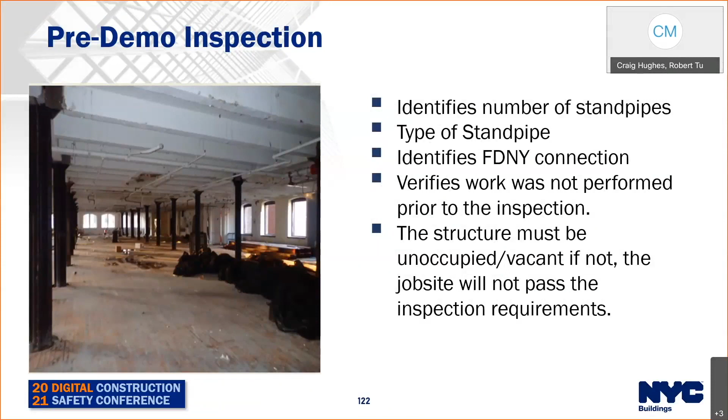Now it comes to permit issuance. The demolition work permit will only be issued after the plans are reviewed by a DOB plan examiner, CSC performs a pre-demolition inspection and passes the work, and the pre-demo inspection is approved by the unit, fulfilling the required items for that permit number. The borough office will then grant a demo permit once all required items have been received.

Demo notification: we will now go over briefly demolition notification, the demolition filing process, and notification requirements.

Demolition administrative process: upon approval of the demolition plans by the CSC Plan Exam Unit, the contractor or applicant can submit a request for pre-demolition inspection to CSC. On passing that pre-demo inspection, the applicant can request or apply for a permit. The permit can be obtained at the borough office: Manhattan, Bronx, Brooklyn, Queens, and Staten Island.

Notify DOB 24 hours prior to the start of demolition by calling 212-393-2550. Demolition work cannot begin prior to the date submitted. Upon completion of the demolition, submit a request for a sign-off inspection to CSC. Upon passing the demolition sign-off inspection, CSC will enter the information into BIS as a sign-off.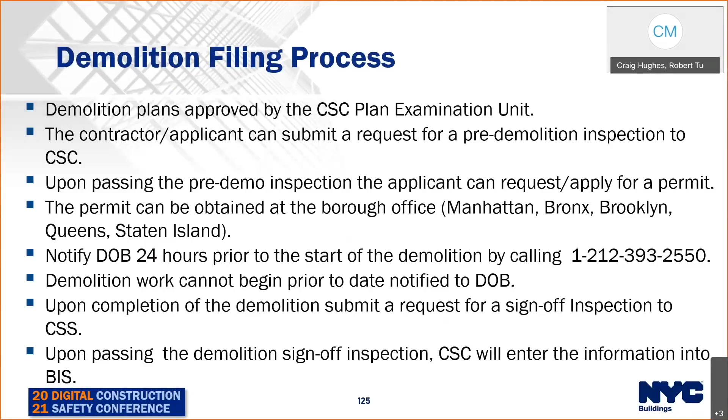Demolition filing process, also demolition notification, section 3306.3 notification: the permit holder shall notify the department and adjoining building owners prior to commencement of full and partial demolition operations in accordance with sections 3306.3.1 through 3306.3.2. Exceptions: notification to the department or adjoining owners is not required for partial demolition operations limited to the interior of the building that provide no mechanical demolition other than handheld devices used to demo the building.

Notification to department or adjoining owners is not required for partial demolition that occurs on the interior, provided such work is a minor alteration or ordinary repair and is accomplished without any mechanical demolition equipment other than handheld devices. Please see these sections.

Section 3306.2, protection of pedestrians and adjoining properties. We will refer you to 3307, 3308, and 3309 on safety zones. This section has been changed; it's now a 1/2-to-1 ratio. When you're looking at demos, safety zones have to be on the site safety plan.

Preparing for demolition: ensure all safeguards are in place. Construction documents are up to date and on site. Utilities are capped. Establish safety zones as required. Ensure all required permits are obtained, including permits from other New York City agencies such as DOT, DEP, and FDNY. Ensure compliance with all permits and the site safety plan. A hydrostatic test of the entire standpipe system must be performed and passed prior to demolition when your building is over 75 feet.

Preparing for demolition, as previously referenced in the demolition plan segment: a demolition sequence should be followed for utilities and service lines per BC 3306.9.1. Prior to the removal of any service, the utility connection shall be disconnected and capped, and filed certifications issued by the representative utility company with the department. You must notify 72 hours in advance to the utility company or city agency.

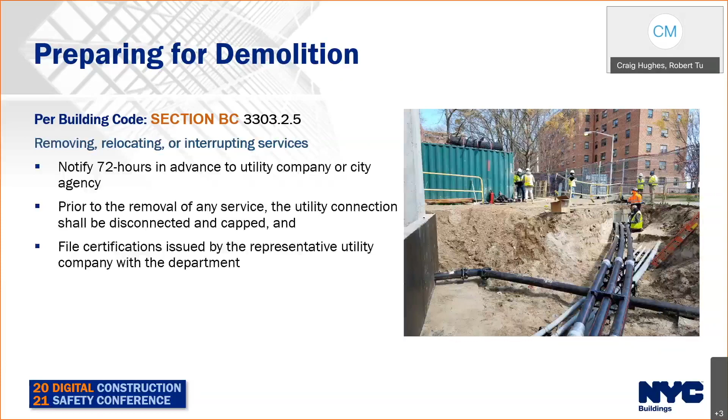As previously mentioned, utilities and existing utility line locations shall be identified. For demolition purposes, we've had instances in the past where crews would break into a line that wasn't indicated on the plan. There was no survey, nothing was indicated, so it needs to be safeguarded before such utilities are disturbed.

Establish a safety zone around all demolition areas. When mechanical demolition is taking place, the safety zone shall be equal to or greater than half the height of the building. Safety zones are important since mechanical means will be implemented in demolition.

As previously referenced in the demolition plan segment, the demolition sequence should be followed, including removal of stories and hydrostatic tests of the entire system prior to demolition. Standpipe systems during construction, alteration, or demolition: fire standpipe to be in a state of readiness at 75 feet or higher, painted red and maintained as a dry standpipe.

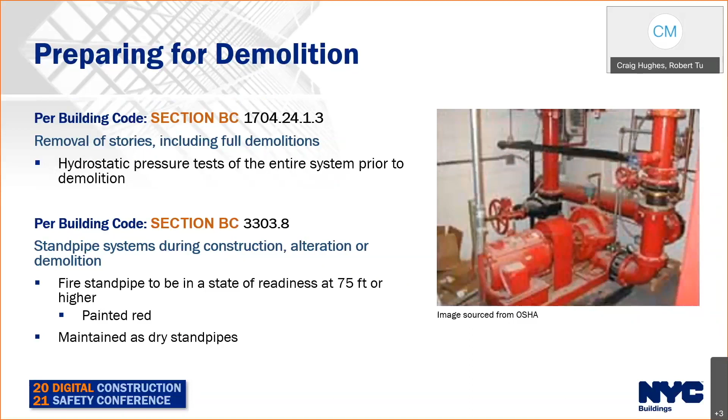The public and properties must be properly safeguarded. Public protection includes sidewalks, walkways, and yards being protected. Roof and overhead protection covers adjoining roofs, skylights, chimneys, and mechanical equipment, with all protective temporary equipment noted on the site safety demolition plan. Roof protection would involve planking, plywood, or 2-inch foam board. Overhead protection would be sidewalk sheds. Skylights could be protected by scaffolding over them, as well as chimneys, depending on the design plan. All protective temporary equipment should again be noted on the site safety plan.

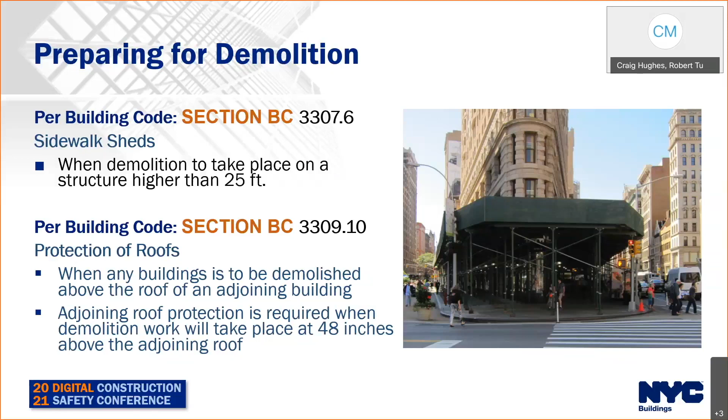In this near miss, 6 workers were performing interior demo inside a house. A DOB inspector who just finished an inspection across the street noticed the workers had removed load-bearing walls supporting the roof. He yelled over and told the workers they needed to get out of the house. As the workers were coming out, the roof started to collapse. A preventive measure would have been to check with a licensed professional before demolishing the interior walls and to follow the demo sequence.

As per BC 3306.8.1, for structural steel, reinforced concrete, and heavy timber buildings, demolition shall occur one column at a time, one floor at a time, so as not to affect the stability of the structure. Structural members shall be chained or tied in place to prevent uncontrolled movement.

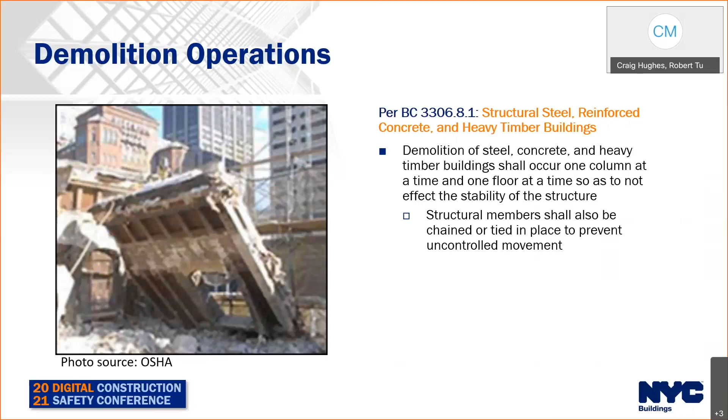Regarding party walls, exits, and fire exits: during demolition operations, the following safeguards shall be maintained. Egress shall not be obstructed. The path of egress cannot be blocked for workers as well as first responders. All exits shall be well marked through proper signage on all floors.

Sanitary safeguards and housekeeping must be maintained at all times. As per 3303.2.4, sanitary facilities must be provided to workers, in accordance with NYC plumbing codes during construction and demolition activities.

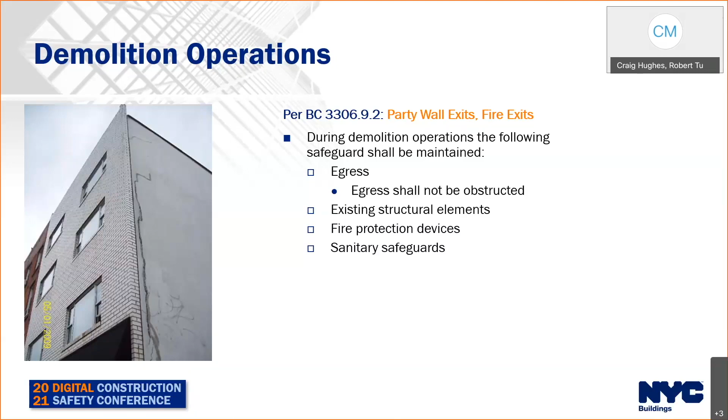Demolition operations, as per BC 3306.9.3, dust: any operations producing dust shall be wetted down during construction throughout the site. Construction site dust can cause airborne particles like concrete dust, which can cause silicosis and affect the public walking by, as well as workers on site.

Also in demolition operations, as per BC 3306.9.4, water accumulation, which was mentioned previously in this program: demolition operations shall not interfere with natural surface drainage, except if the cellar is to remain, in which case the slab would have to be cracked to allow proper drainage. This would need a waiver from the building department, which can easily be obtained, and conditions would have to match the conditions on the plan.

As per BC 3006.9, temporary elevators and standpipes must be employed for buildings over 75 feet. Existing standpipes are to remain as standpipes during demolition operations, as previously mentioned.

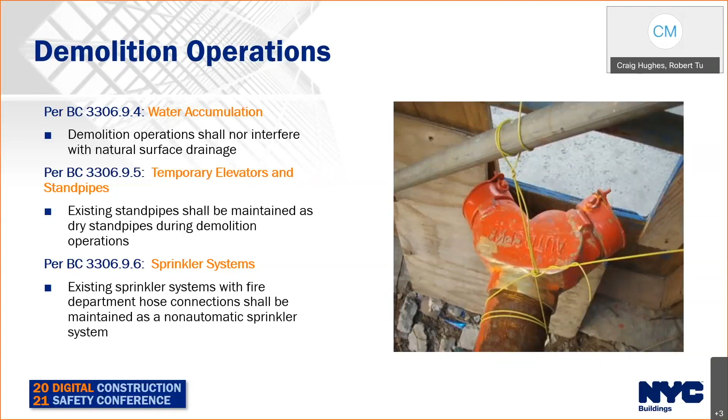Protection of foundations. Water shall not be permitted to accumulate or cause damage near the foundation of the premises, nor adjoining property foundations. Drainage of excavations and accumulated water shall be maintained throughout the site.

Areas where special dangers exist, warning signs shall be provided. Special dangers include but are not limited to vehicle entrances, exits, hoisting areas, and areas where combustible materials are being stored. This is a good chunk of fire code violations that inspectors are well trained in writing.

Areas open to non-workers. For areas that are open to persons other than workers, a flag person shall be provided. You will find these when operations have to cross the sidewalk. We will temporarily close these areas for non-construction personnel for their safety.

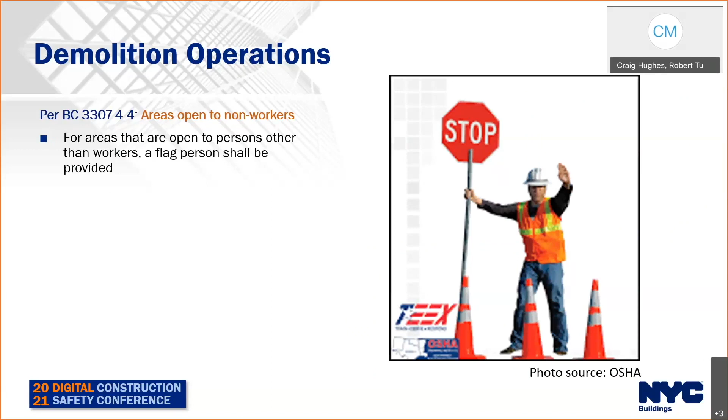3306.9.9, stairs. Stairs shall be maintained and closed during demolition, except for the topmost floor being demolished. A good part of this is the staircase usually acts as a fire stop for the fire department and a safety measure. If there's a fire, they still need fire protection going up the staircase.

Debris chutes. As per 3303.5.5, the chute shall conform to manufacturer specs and approved plan drawings. The plan shall indicate detailed information on how the chute shall be used. Debris chutes at an angle of over 45 degrees shall be enclosed on all sides, while chutes at an angle of less than 45 degrees may be open on the upper side.

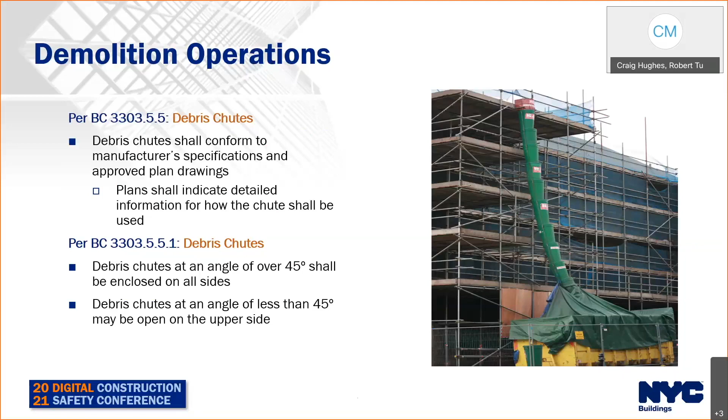Debris chutes shall be rigidly braced and supported for their entire length. Chutes have metal plates inside to direct the flow of debris while falling. A gate shall be provided at the lower end of the chute to control material loading into trucks. Debris chutes over 75 feet in height shall be composed of non-combustible materials.

Debris chute permits. Permits and design drawings are required for debris chutes, and design drawings shall be prepared by a registered design professional. They are not required for chutes installed on buildings 40 feet in height or less, chutes installed in accordance with manufacturer's design, or chutes not attached so as to impart a load on scaffolds.

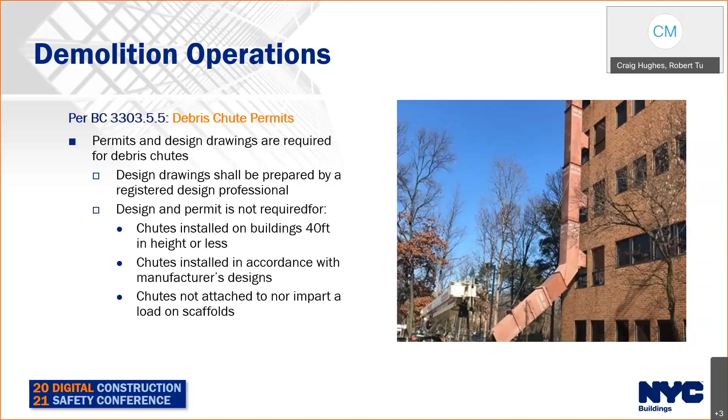3309, Protection of adjoining property. In the picture, you see a building covered in waterproofing. 3309.9, weatherproofing integrity of adjoining buildings. Processes include bending over and flashing all roofing material of adjoining buildings, sealing and permanently waterproofing all doors and other openings in party walls, properly sealing all cornices where cut, pointing up and making waterproof any disturbed parapets or walls, removing all exposed furring and plaster on party walls, and removing and replacing, firmly anchoring any loose wall materials.

Demolition sign-off. Our next topic will be the inspection appointment request and demo sign-off inspection. The purpose of the demo sign-off inspection is for the department to confirm the final condition of the job site. The form must include a cover sheet, and all applicable sections must be filled out, indicating it's a demo sign-off inspection.

Completion of demolition process operations. All work required for structural stability and permanent waterproofing of adjacent buildings must be completed prior to demolition sign-off. Buildings must be completely demolished, the site graded, all debris removed from the site, and the site fully backfilled.